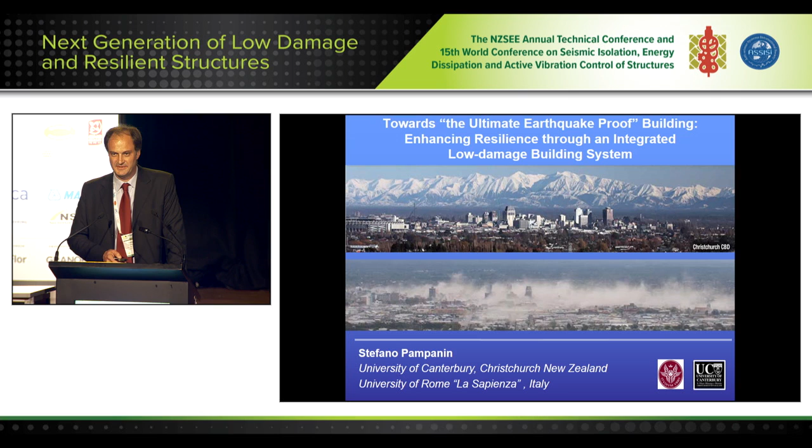Now, to try to enter right away into the core of the presentation, for the non-locals or people who have not been in Christchurch before the earthquake, that was Christchurch City before the earthquake. This is Christchurch City during the earthquake, and this is Christchurch detailing after the earthquake.

The one that we are going to, we all technical engineers said, what a fantastic plastic hinge. It looks like a Park and Paulay Priestley book. Before taking off the ceilings, after taking off the ceilings, this is the PricewaterhouseCoopers building, 22-story building, from 1980.

I've been literally using this slide for probably 15 years to show how fantastic the precast concrete solutions in New Zealand are when compared to somewhere else in the world, including Italy, where precast concrete is only precast. It's not a mixture between precast and emulation of cast-in-place, while in New Zealand, Japan, and other countries, you get actually a mixture of that.

So the emulation of cast-in-place means that you get an emulation of cast-in-place behavior in the connection, which means that you get a plastic hinge. That's exactly what you wanted to have because it's part of the capacity design consideration. And then as a result of that, you just end up having a building which has to be demolished.

Now, in a way, we knew that. From a technical point of view, as we know, the engineers in New Zealand have been a bit hammered by or blamed by the population, saying you did not do your job, you are incapable. It was quite a harsh time with a commission of inquiry, trying to ask why things did not work well. And we know that the answer from a technical point of view is that it actually did do the job of saving lives. So we are repeating things that we know very well.

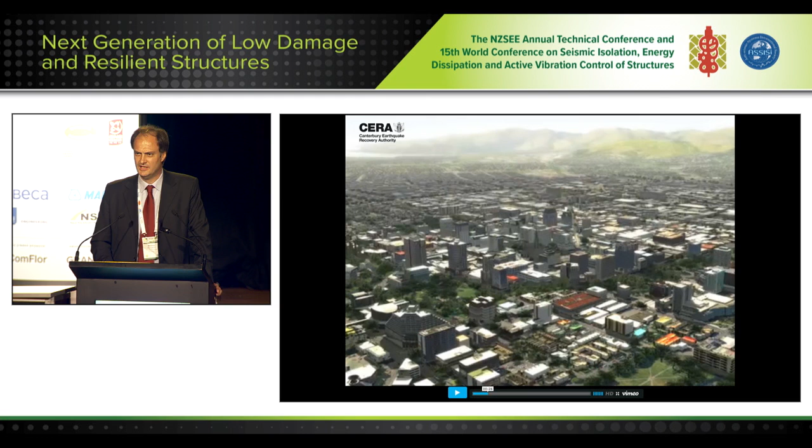Now, showing the CERA video of the city before and after, when I do it overseas, people are shocked. They are saying, but New Zealand is supposed to be a well-developed, non-corrupted, well-aware seismic country, where things, even in a big earthquake, should not be like that. And even worse, when I was explaining that from the aerial point of view, the city of Christchurch after the earthquake looked like something like Middle East, Dubai, under deconstruction instead of being in construction.

So quite a substantial result, which is questioning now, is becoming probably the most of interest earthquake in the world, because people are taking New Zealand as a model. They were, and they're still, in the sense that it's a well-developed, well-aware country in terms of seismic resilience, seismic resistance.

How could it possibly lose potentially 40 billion New Zealand dollars, which means 25% of the GDP? The Minister Joyce explained that it meant actually 20% of depth of the GDP increased in terms of debt.

Now, we were thinking about doing something okay. People are asking us, the population, society, to be safer and resilient. Resilient is something which is hiding everything, as Gianmario was mentioning - the mayonnaise for a cook can be an important term, but very, very complicated. So what does it mean, resilience?

If we borrow the concept, and that's been happening from other disciplines, resilience is the capacity to be hammered, in a way, to be impacted by an event, and then coming back, resurging back, but not in the elastic range. From our technical point of view, elastic would be to come back through the same path. It's not the same thing.

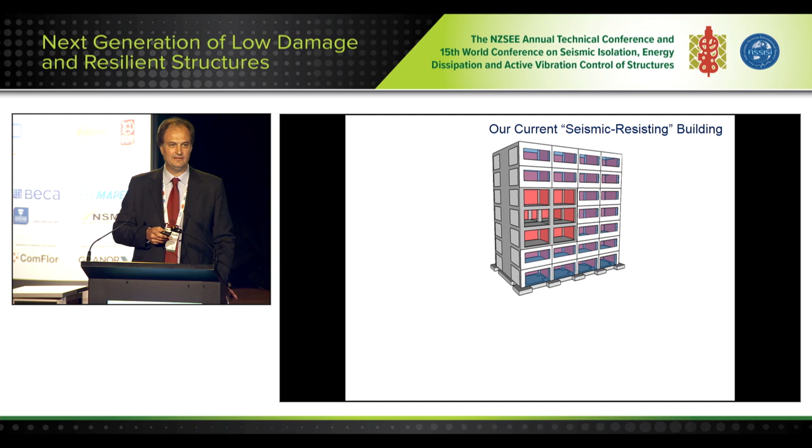So this is what we are trying to explain to the non-technical people about our contract. I'm the engineer, I'm designing for you something like that. I wish we were using all the same slides - I'm designing a seismic resistant building, which is going to have a fantastic plastic hinge in the beam column joint, and the skeleton of your building is going to be damaged, but where you want it.

So it's like having your knee being severely damaged, but you're still standing. Your hips or your diaphragm are completely gone because rigid diaphragm assumptions from an ETABS or SAP2000 code don't stand, so they're not really working in the rigid range.

Of course, the non-structural elements, heavy or not heavy, are going to be completely destroyed at a seismic design level, so a 500 year design. And if you're looking at the facade, the envelope of the building, unfortunately there's something which is actually a problem around the world, because these are supposed to be non-structural, but they can get into trouble, reaching a drift level, and they can fall apart and become life-threatening.

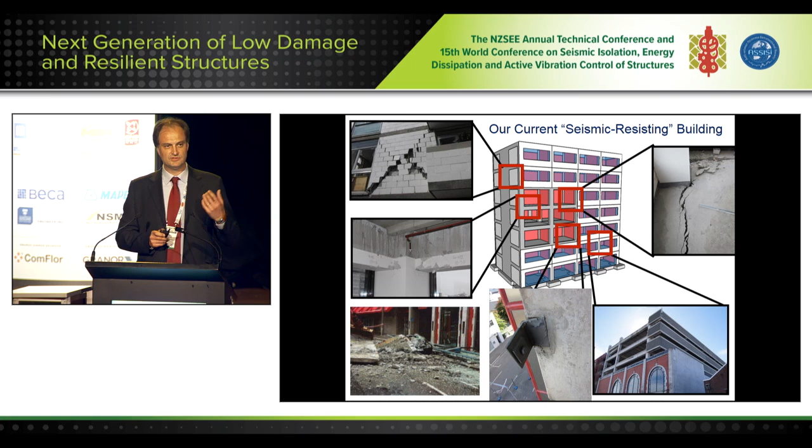If they are life-threatening, theoretically they should be able to stay there intact without collapsing under the design level of earthquake. No code in the world is actually implementing that, but every code in the world is talking about life safety. So we keep talking with our people.

This is just the superstructure, but then your foundations are in trouble. So this is what we hope Misko will give us some solutions for, because it's not only the superstructure, but also the foundation - the whole building system.

And we've been mentioning a lot about low damage, and what low damage means and doesn't mean. At least it should mean that the structure should be okay. Then it should mean that the non-structural elements, the dress of the building, which is very expensive, should be okay. And then it should mean that, of course, the foundation should be okay, and the whole community with the vertical infrastructure and horizontal infrastructure should be okay.

So in a way, we've been - I shouldn't say cheated - but we haven't told the truth to the population when we should be explaining that if you design by code everywhere in the world, that's what you get: a red tag. And if you want to know more about that red tag, this is an add-on to the Vision 2000 document: repairable, irreparable. We don't really know where the line in the sand stands, but we know that around here, more likely you're not going to be repaired.

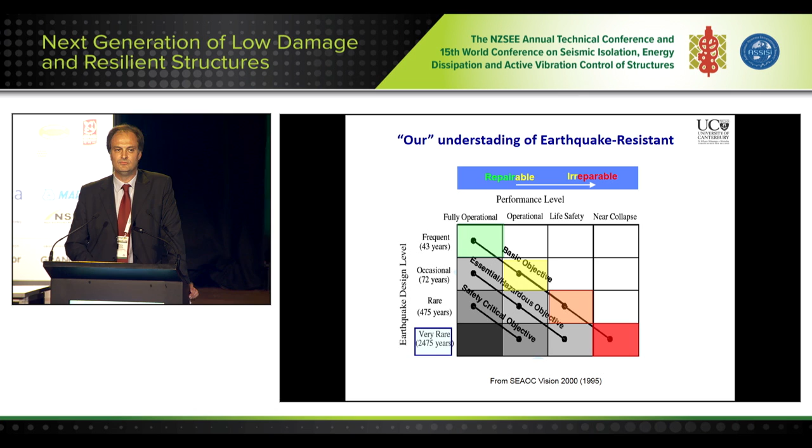So you don't get a new car unless you have insurance, but you are not able to restore your life very promptly. Same tagging system applies to something that we as engineers understand. Structural engineers, think about a pushover.

How many of us would still have a friend in our client when you go there and say, that's exactly what I designed for you, and I'm a fantastic engineer because I'm giving you a great solution - it's going to be a seismic design system. So what is the problem? We have not been explaining to the normal non-technical people that a code doesn't mean target.

A code is a minimum by law, something I often mention to my students. A code is what you have to follow if you want to avoid jail, nothing more than that. It's not meaning a good design.

So we are talking about earthquake resistant, and people are thinking earthquake proof. It's not earthquake proof. It's not bulletproof, come and shoot me. And this is what people think an earthquake resistant design is.

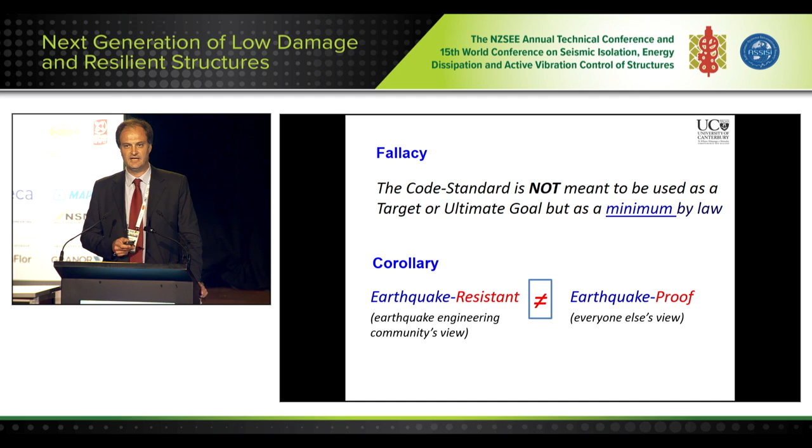So there is a major communication of risk that we are not delivering, and we should be doing more. In a way, what we should be doing is take this basic objective and push it back, making something whereby under a quite significant earthquake, I'm still in the good operational range.

Now, let's go back. Learning from our ancestors. We did not invent earthquakes, they've been there for a while. And we did not invent earthquake-resistant structure, they've been there for a while. One of the oldest possible ways of taking earthquakes and going through that is rocking marble blocks on top of marble blocks. No steel, no dissipation devices, no post-tensioning, nothing. It was really the concept of blocks moving against each other and getting the mass behaving as a weight and giving you stability.

The mass is bad, weight is good. Can we have something which gives you only a weight, but not a mass? We should basically be taking off gravity in one direction and not in the other.

Gianmario mentioned that we like to go back and see that not only the Greek system was providing a rocking behavior, but also they had something which was, this is a very bad broken English translation of the Latin of Pliny the Elder, Diana Temple was using charcoal spheres as well as wool furs, sort of a slider, in addition to the rocking system. Fantastic. They were extremely ahead.

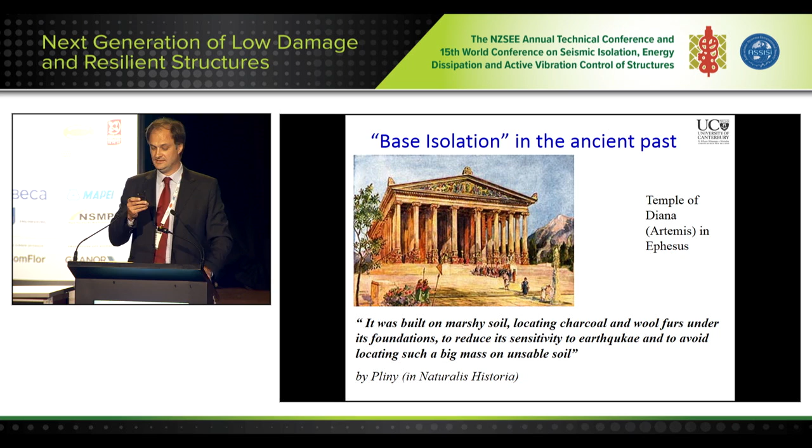There are other concepts and so forth. Base isolation was not invented by B.R. Robinson, but B.R. Robinson has provided one of the most used systems that has really been leading the world in terms of isolation, the lead rubber bearing. If you think about the other one, sort of a slider type of solution, that was already the charcoal and the wool furs, but the Greek did not have a patent.

I thought that this was one of the earliest. Gianmario proved me wrong, saying that the French, where is Caroline? Caroline. We can't give credit to the French for having invented the first patent. So I think that Viscardini, Italy, deserves to be referred as the one for that. Caroline, sorry for that, and Tony Holden.

So what are we doing? Basically nowadays it's re-engineering the past, re-engineering solutions of isolation, rocking, in a way that people have already been using, and trying to add something more.

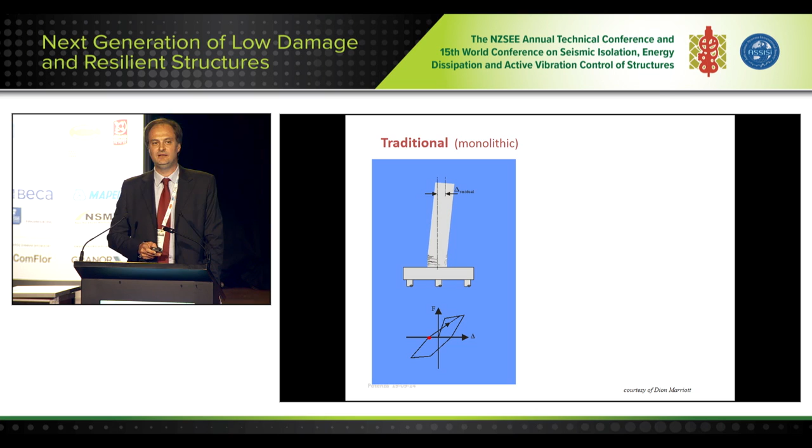So the new system is basically a new temple, which instead of going back and forth and getting the damage in the ductile plastic hinge, is actually jointed, is ductile, is a temple rocking, not made of marble, but made of concrete, steel, or timber, whatever material we want to use, glass, anything possible, and is taking advantage of a recentering massless weight. What is a massless weight? A cable, a tie-down. A tie-down is something that can give you stability, weight, but not the mass of the temple. So it's basically, and don't call it post-tensioning, call it a tie-down. Everyone will understand a rope.

While it's moving back and forth, now we have the option, which they did not have in the past, to use dissipation. What type? Easy, mild steel bar.

But if we want to move one step further, we have to think that very often people have been trying to imply that capacity design has been proved wrong by the earthquake. In reality, I'm saying that capacity design has been saving a lot of the concept, has been saving thousands of people, possibly in Christchurch, possibly, not just around the world.

But capacity design is still extremely valid because, if you remember, it was nothing else than the concept of the chain. And we are still applying capacity design, and we must apply capacity design in any single possible new connection or new system in the future, where for us capacity design is the whole building system.

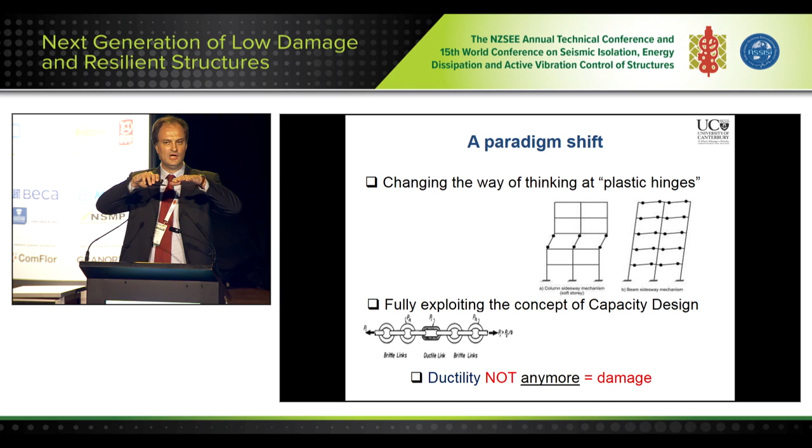Starting from the foundation, moving up: skeleton, non-structural elements, horizontal, vertical—the whole concept should still be maintained. In the past, pre-1970s, we were at a certain level, and then we got to the weak beam strong column mechanism, capacity design, where a plastic hinge meant damage. That wasn't a capacity design issue, it was a technology issue.

Lack of technology, not available until a few years ago, implied that a plastic hinge means damage. Now, with technology that's 2,500 years old—like the Greek temples—we have the opportunity for a plastic hinge not to mean damage anymore. But if we have steel rebars within our connection, we still get a system that's not easily repairable. So how do we get repairability at the weakest link of the chain?

Let's think about concrete in a different way. Instead of having the steel inside the concrete, let's put the steel outside at the connection level. This steel outside, if properly protected from corrosion and arranged to have an anti-buckling behavior, is basically the fuse—the electrical fuse—of our seismic system. It's our seismic fuse. It's a capacity design implementation.

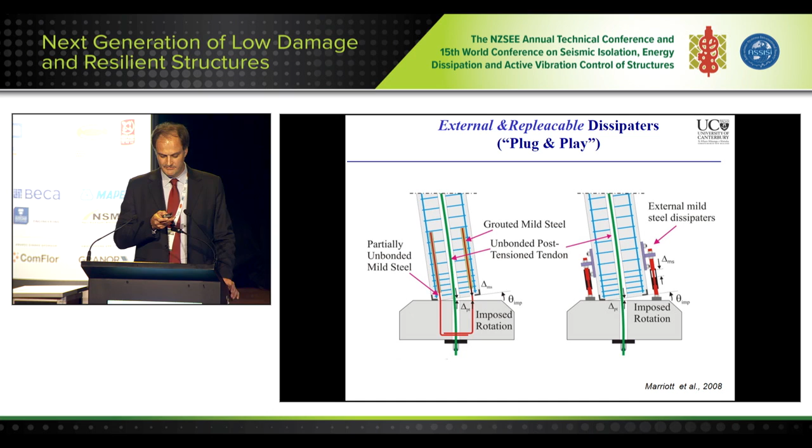We like to call this plug and play. Why? Because if you give something a name, people remember it, they like it, it becomes fashion, and they use it. This has been one of the successes of this concept.

Think about communication of risk—instead of talking to our clients and friends about a damaged plastic hinge, we should be talking more about what type of viscous damper, shape memory alloy, or device 2.0 you have in your living room. That was a joke back in 2005, but if we make earthquake engineering fashionable, we now have the possibility of getting things to happen much quicker and faster.

You can do it in concrete, steel, or timber—the whole concept can be developed once you grasp it. Obviously details have to occur in different ways, so R&D, research and development, has been happening quite quickly in the last 12 to 15 years. And this is only about components—then there's frames and walls.

Then you have to address the flooring system. There's been a huge effort, starting definitely in New Zealand, with a lot of contribution—Des Bull and others—pushing for diaphragm solutions. There are different options we can now implement, like non-tearing flooring solutions, and so forth.

What I'm saying is put everything together. And don't forget the dress—being Italian, you'd appreciate that we care about that. What I like about Italian architecture, from my half-life over there, is that the architects are quite demanding: fair enough, whatever you give, but I still want to maintain the energy efficiency of the building and the whole architectural beauty, and so forth.

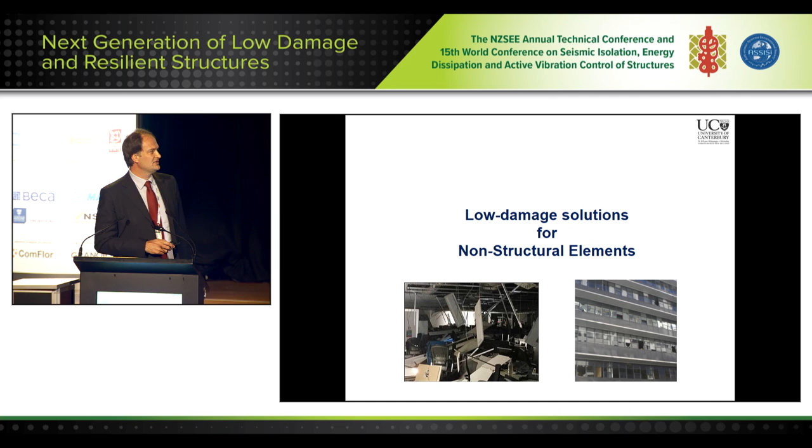So what we're getting at is thinking about a skin that goes around our skeleton—a waterproof skin which is deformable but not damageable. What we're doing is dividing the skin into many small pieces, similar to what you see in some animal furs—many small pieces moving slightly against each other. That movement, whether for partitions or facades, allows the overall movement to happen.

We've been developing this system—they exist, they can be adopted, and they've already been used in some situations. As low damage—we're not saying non-damage—they can achieve, for clay bricks, partitions, or facades, up to 2.5% drift without a single crack, which is quite substantial. The whole concept allows this small rocking movement of the Greek temples within the system.

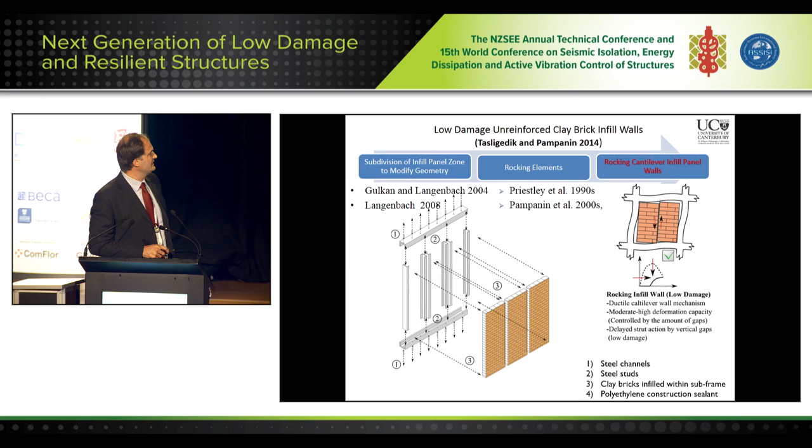Now let's see what it looks like. To our clients we should say: forget about the old generation of buildings. Now we have a new generation of buildings, made of a skeleton which is likely repairable, a flooring system which is repairable, and a dress which is more likely repairable, or at least less damageable, and so forth.

If you put the whole package together, you're getting towards earthquake-proof. We don't have the earthquake-proof building just yet. Gianmario spoiled the surprise—well, not really the surprise.

He showed that an isolation system using lifting a house will be the future. I mean, it's a concept. In reality, we're going to get the ultimate proof building when we're able to completely lift up our house or property when the earthquake comes, maybe using magnetic fields and so forth.

So, 15 years of research in a lab, where the skeleton and the dressing are all put together. I'm going to show you not the details, but the whole thing put together. Now, hold on—if it works, it's supposed to be working. Hold on, go back.

Now this is supposed to start. Why isn't it starting? It's just delayed.

This is basically a renewed rocking Greek temples, beam and column, post-tensioning through. You get the dissipators, the plug and play top and bottom, and these went through literally 100 earthquakes before we allowed the press to come over and see what it looked like, because we did not want people saying we were bringing bad luck when doing research.

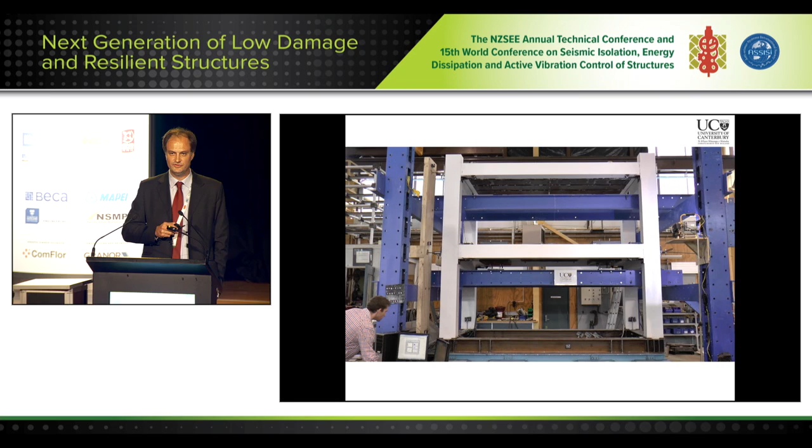This is just an example, excuse me, it's supposed to be going. This is the example of the rocking temples in action, the modern version. There you are, 2 minutes, okay.

So it's moving a lot. Just imagine this big opening here typically would be diffused, spread in a plastic hinge, meaning a lot of cracks. The sum of those cracks are now concentrated in gap opening, and the plug and play, which can be made of anything, are actually working.

And this, if you can make it work, and then I'll be flying through, is the skeleton, the skin made in pieces. Focus over here if you can.

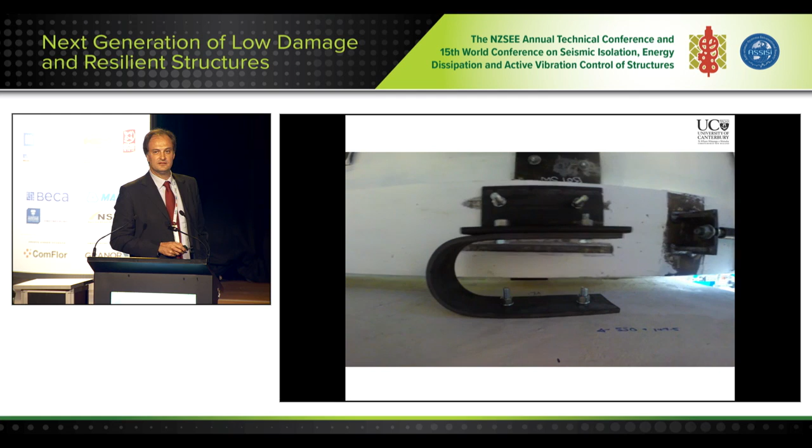There you are. You see a little bit of relative movement is allowing the system to take quite a big level of drift. And underneath, the connection can use a U-shaped flexure plate invented by Ivan Skinner in 1972, or anything else.

Now, quick and fast, because I have 1 minute 20, probably Misko will be reminding us that the whole system is not only made of the superstructure. The earthquake in Canterbury showed that there are issues of soil structure interaction. The foundation suffered a lot.

From a point of view of performance, from the point of view of a geotechnical engineer, that's the pushover they'll be thinking more about. So it is possible, we've been working on it, to make an integrated performance-based design where the superstructure, the foundation, and the envelope in terms of non-structural elements can be accounted for.

Vision 2050, New Zealand reconstruction, the blueprint, there's been a lot happening, and there's a lot of this technology going on. You can go on site, and you might be going into some of these buildings, concrete, steel, concrete timber, and all the rest.

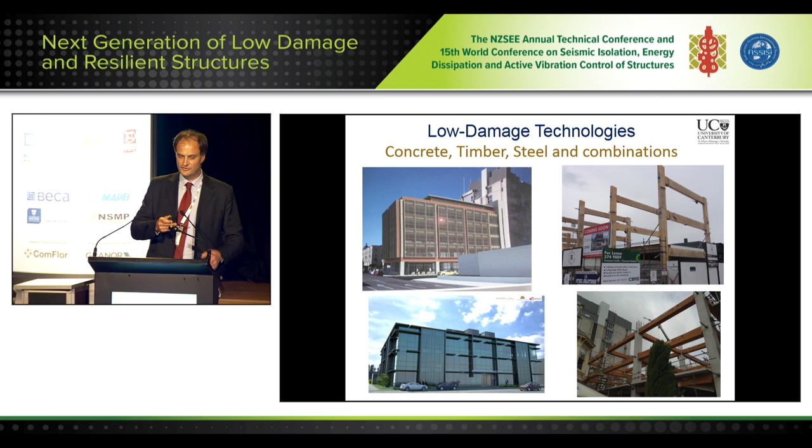Now, I want to finish with 3 challenging slides. In the future, we want to get into a system which we can actually monitor, but not from the old way of thinking. You would like to enter a car and know everything, and these are written in Italian on purpose because you will know what they mean. We should be having our building system telling us what is happening to the building system as it goes.

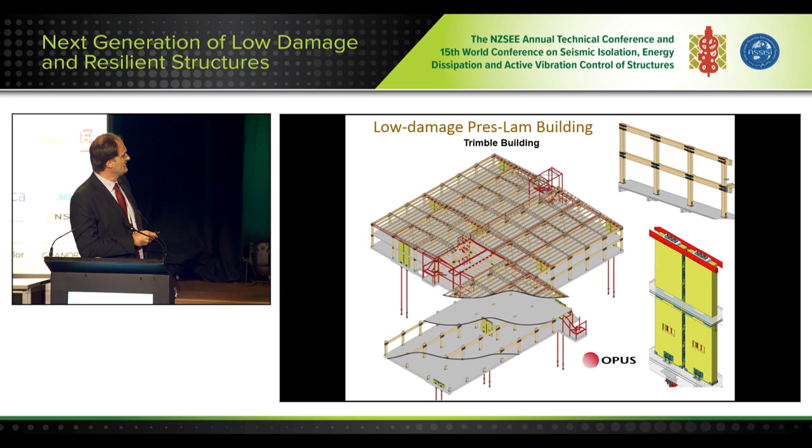And this has happened partly in one of these low damage systems, and the concept is to have safer, sustainable, smart, S3 design, where you're going to have a system which is supposed to be safer, sustainable, and smart, fully monitored, and can give you this solution.

Last slide. Now, how much does it cost? Think about what has happened in the last few years. So the telephone moved to something, a mobile phone, which was very expensive, and then eventually we got what we got. How much did it cost? At that time, divided by the salary, it was quite expensive. Later, when it came out, divided by the salary it was less expensive. Now it's affordable by everyone.

So similarly, now you understand the thing, you can think about the computer. You remember this, IBM 1980?

Hugely expensive, less expensive, everyone has one. Now, why do we not think that a building system, post-1950 capacity design, and rocking cannot be affordable?

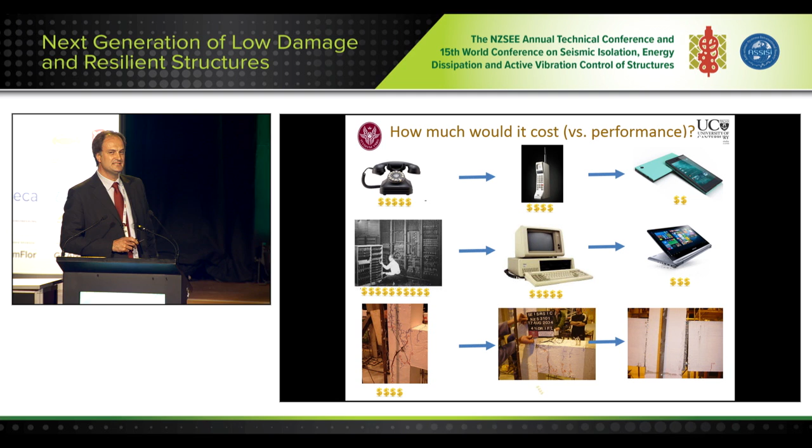It's a matter of people doing marketing on other things, so no one is actually doing marketing on this. We should be telling people that the cost in this case did not change dramatically, but the performance changed dramatically.

It's really a matter of communicating what we are doing, and the challenge we face is: if we really want a full building system, the whole nine yards, who is going to help us sell it? It's not our job to sell it, like people would for computers or phones. So maybe we should bring in, just to name some, iPhone, Samsung, or Huawei, to buy the New Zealand IP of the low damage technology and sell it around the world on our behalf.

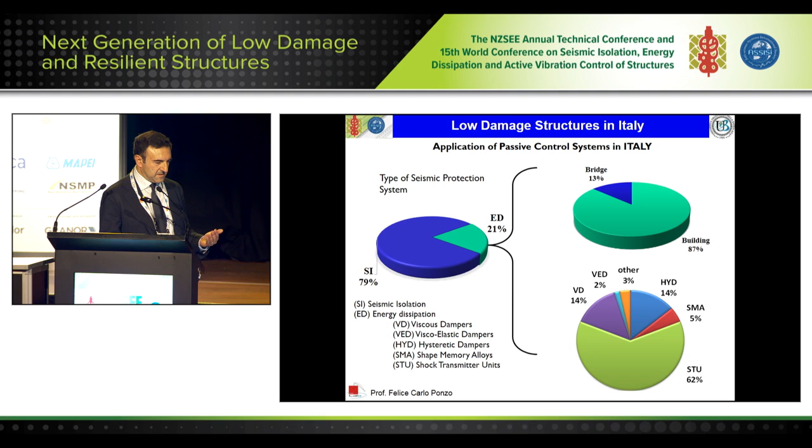We are now considering what the future holds for this kind of application, starting from research. Our activities are developed within a large Italian program, the RELUIS project — a network of university laboratories of earthquake engineering that now involves more than 1,500 researchers across almost all Italian universities working in the field of seismic engineering.

That network has facilities for earthquake applications. In our laboratories we have a testing machine for type tests and factory production control tests, able to perform tests on several kinds of applications. You can see here some examples of tests we perform, which allow us to better understand the behavior of these devices.

But as Gianmario Benzoni said this morning, I think it's now the moment to start very strong collaboration between earthquake laboratories, in order to better understand the behavior and how we can use this information to improve the behavior of the devices and of the structures.

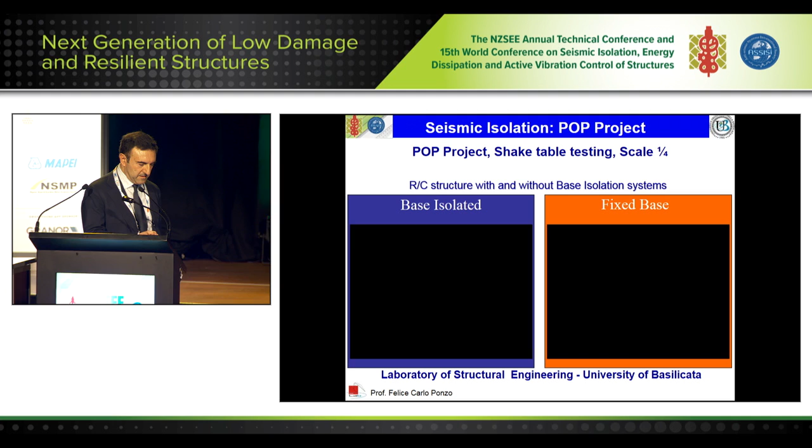Our activities are mainly devoted to the study of existing buildings, because there is a big problem in Italy. We started with applications considering existing buildings designed only for vertical load.

Then we applied several kinds of base isolation systems in order to understand the performance of this kind of device. We used rubber, steel, friction bearings, and shape memory alloy-based bearings in order to evaluate the ratio between performance and cost.

We observed that almost all devices had the capacity to improve dramatically the behavior, reducing the interstory drift under the damage threshold for non-structural elements too.

In this application, you can see other tests we performed on buildings designed for vertical load only, considering also the application of infill panels in order to evaluate the damage on this kind of element.

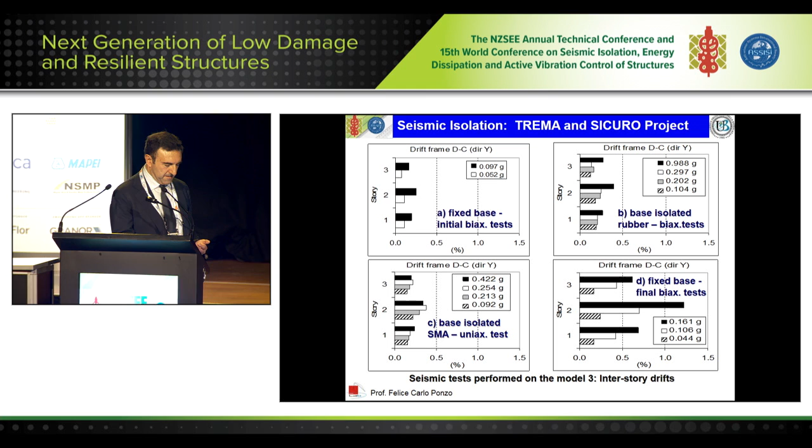Also in this case, we observed a very good behavior of the specimen, achieving good performance with a very low drift value observed at the end of the test.

In several tests, we also used in situ application, because after lab tests, several kinds of devices were applied in real buildings. So we performed some release tests.

In this case, it's a building in Basilicata, in Italy, south of Italy. We moved the building using a special device, then we released it suddenly in order to verify the effectiveness of the device.

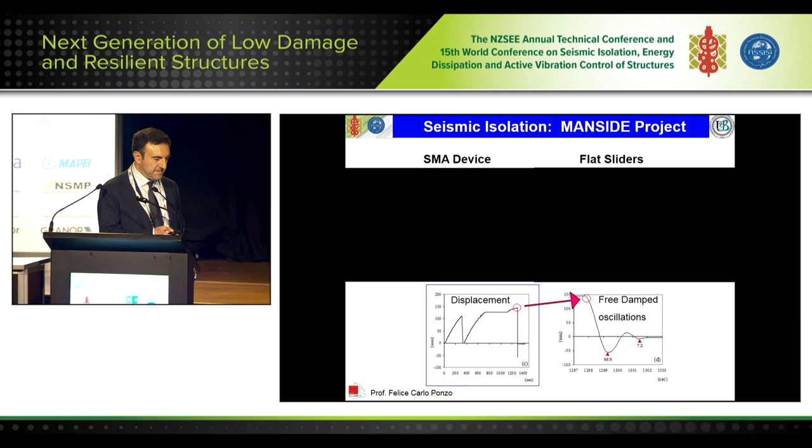We used three configurations: shape memory alloys, rubber, and mixed rubber and sliders, in order to understand the difference. All the devices were able to reduce drastically the oscillation of the buildings.

Using the CAM system, it's a cable narrowing that produces some increase in the out-of-plane resistance of the masonry, and also base isolation using the rubber bearings.

High damping rubber bearings, and we observed also that buildings designed for vertical load were able to overcome the very high ground acceleration.

In this case, we used some lab tests in order to evaluate the behavior of double curvature friction pendulums. It's a device with a very increasing number of applications in Italy now.

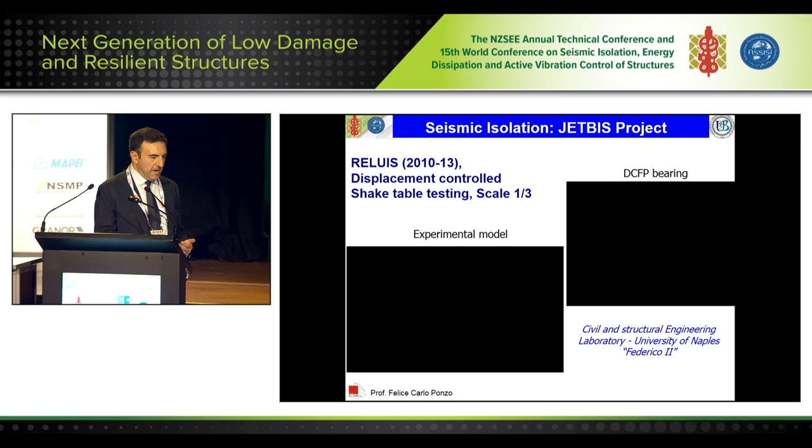For that, we need to understand well the conditions of functioning of this kind of device, considering different kinds of friction - high, low and medium - to understand the residual displacement. We used several tests with real accelerograms and artificial ones in order to understand the capacity.

Moreover, using this kind of device we performed new in situ tests. This is an industrial building based in Sicily, in Augusta. We performed on the completed building the release test using a public test.

In order to verify the effectiveness of design, to verify the capacity of the isolated systems, to verify the real damping, the modal shape and the frequencies, then the period, the correspondence between the real and design period. In that case, we found very good agreement between design and experimental values.

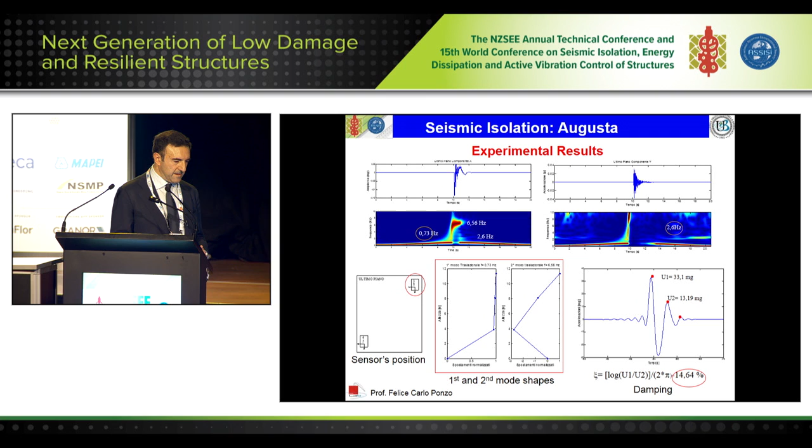Changing the kind of devices regarding energy dissipation, we performed a lot of tests in order to understand the difference between several materials. We considered hysteretic dampers, but also viscous and shape memory alloy based, in order to understand on existing buildings which is the real behavior.

In that case, we used lab tests, but also in situ tests realized in the ex-Italsider Bagnoli industrial area near Naples, where we used a real building, cut it, and for each piece we used several different kinds of devices in order to understand the behavior. In all cases, we found good capacity of the buildings in reducing the seismic vibration.

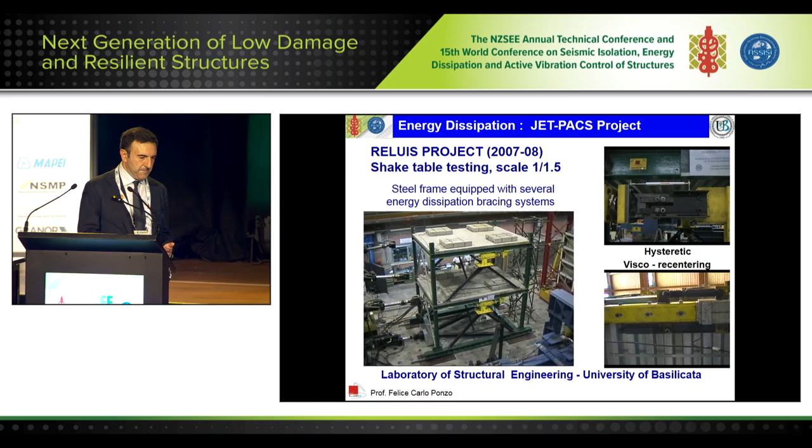We are observing another test performed in the University of Basilicata lab, in which we performed the test considering seven kinds of devices. A lot of universities in Italy were involved within the RELUIS project, and we used hysteretic devices with steel, aluminium, visco-recentering based on shape memory alloys, viscous dampers, and so on.

One of the results, very interesting, of this kind of application was that the dissipating braces systems are very robust. It's an approach that allows reaching good results, also changing the mechanical characteristics of the devices in a very wide range.

We found that, for example, for hysteretic devices, changing by plus or minus 50% the resistance, the results don't change - it is very robust. At the moment in Italy, there is an increasing number of real applications in the Basilicata region. We now have almost 10 buildings, mainly school buildings, realized with this kind of application.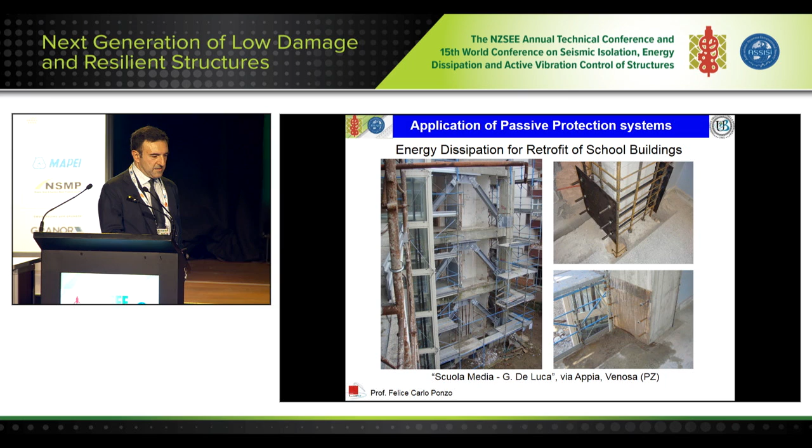Steel braces with, in this case, steel devices. You can see here some details of this kind of application. This is a school in Potenza city, and another school that certify the capacity now of companies, but also of designers to consider this application and to design this kind of solution.

Another kind of application that we studied is the DISCAM system. It's very near to the concept of the PRESSS system. We used some dissipative elements in the angle, as shown before by Stefano. In this case, the dissipative elements are formed by L-shaped mild steel, and they dissipate energy in the rocking movement between beam and column.

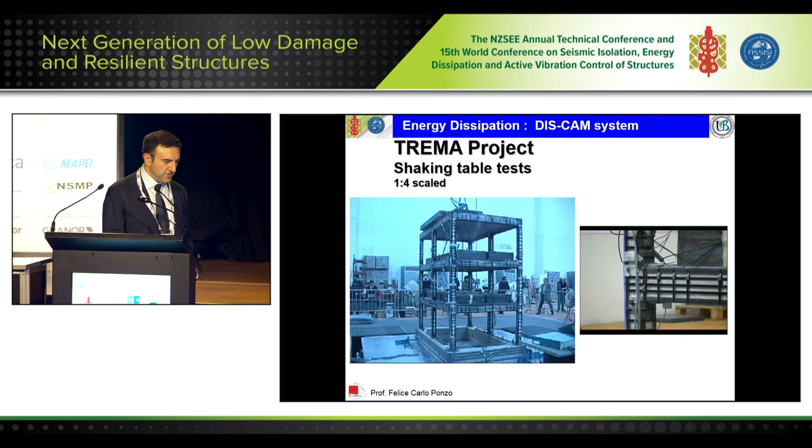For existing buildings this is a very, very effective mechanism. In this case, we used a frame realized considering only vertical load. We applied very strong motion in order to verify the capacity of this kind of system to protect buildings.

At the end, I link with the presentation of Stefano. I will present experimentation we are carrying out at the University of Basilicata in collaboration with the University of Canterbury. We started using the system to verify the capacity of beam column joints to be applied also to glulam, a different kind of solution for wooden structures, the typically Italian and European solution.

And we applied the test using also the configuration in the... I don't know if we can go back, but okay. In the movie, you can see the movement of the steel elements during the rocking of the beam with respect to the column.

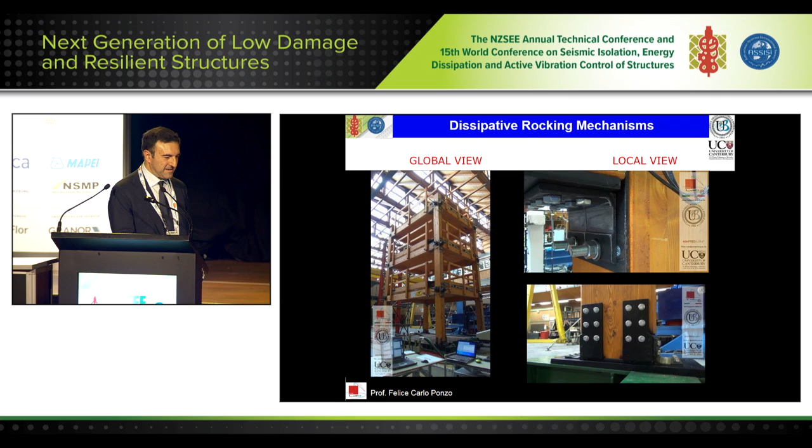After that, we performed the dynamic test on the building, on the 3D buildings. In that case we applied at the moment almost 150 destructive earthquakes without any damage. So we demonstrate that the system is very, very strong, very effective.

The next step, this is some result in order to verify that the system is very good with the post-tension. There is some improvement of the behavior using the dissipation, in terms of increasing the capacity of displacement and the peak ground acceleration as input for the building.

The next step will be a new solution in order to reduce the displacement for this kind of building, using, in that case, bracing systems with U-shaped steel elements mounted on top of the inverted braces. Now we are starting with this kind of application.

Next June, I hope to have Stefano at the University of Basilicata to present the experimental results to the engineers in Basilicata. We can see here some pictures of the work that is now in progress.

Concluding, the experiments that we are carrying out in Basilicata are confirming the effectiveness and robustness of this kind of strategy. I think now we need to change the design code. We need to change the way we design, because it's not possible now to accept any damage. It's important to reduce the damage after an important earthquake.

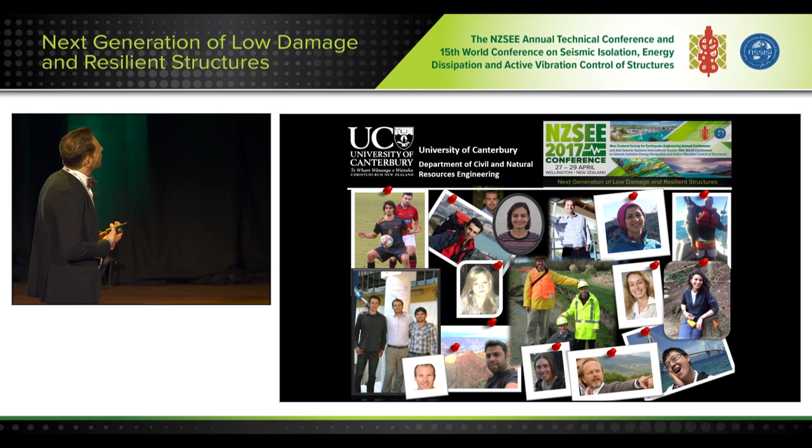I see myself more as a messenger of a wider group. These are all young researchers, but also colleagues that I work with, starting with Stefano in 2003 when I came over as a postdoc.

So let's talk about item number 8: lessons learned from recent New Zealand earthquakes. I want to go straight to the Kaikoura earthquake, since we had a good presentation yesterday with a good overview. But I want to point your attention to two case studies.

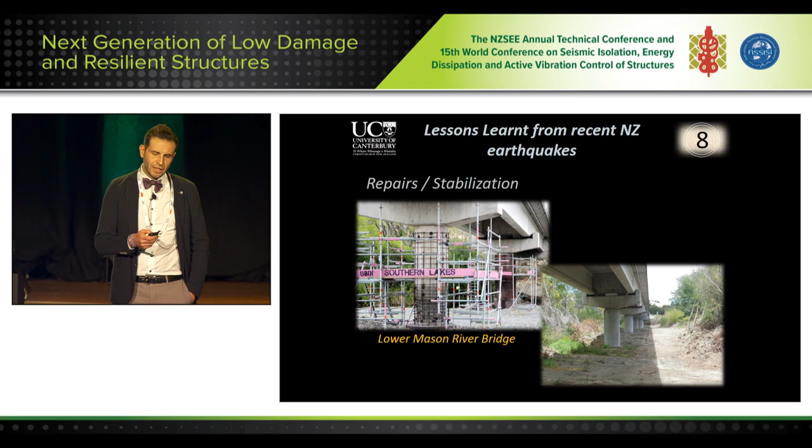The first is the Lower Mason Bridge, which is very close to Waiau, near the epicenter of the earthquake. This bridge sustained damage where 7 bars fractured out of 16. The bridge was obviously very close to collapse, and it was repaired within 1 month, though with loss of functionality in the meantime. The repair was a sort of concrete jacketing.

Now we look at the Awatere River Bridge, close to Blenheim. This bridge is interesting because it went through 2 major earthquakes: the Seddon earthquake in 2013, where they did jet grouting on the piers, as you can see at the top and bottom, and then in 2016 the Kaikoura earthquake caused further damage.

This poses some questions about post-earthquake residual capacity. What are we going to do - grout injection again with this type of structure? Or do we need to think about how to sustain structures through multiple events and long duration earthquakes?

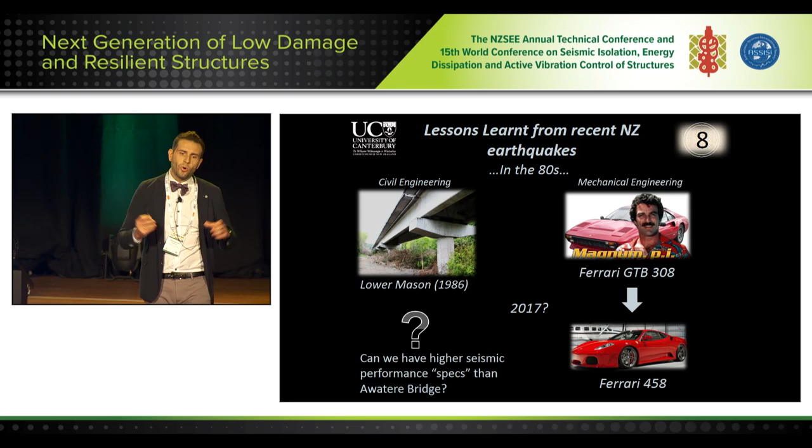I like to think about the Lower Mason Bridge, built in 1986. In that period I was a kid, watching Magnum PI and the Ferrari GTB - being Italian, I like Ferraris. Now I think about 2017, and I say okay, this is the new Ferrari, the 458 - totally different from the 308. The Awatere River Bridge was designed in 2007, and this is the supposed Ferrari we are currently using.

So what we have to think about is the ingredients for a perfect damage control recipe. This is item number 7.

We know there are a set of damage-resistant technologies, and obviously we know about seismic isolation - there have been excellent presentations so far. We know we can also use pure rocking, either rocking of the foundation or stepping piers, with a beautiful example here in New Zealand, the Rangitikei River Bridge designed by Beca.

Or alternatively, as you've already seen from Stefano, we can think about mechanized hinges, which have self-centering capability and the ability to replace the reinforcing after the earthquake. For a bridge, this is quite a good concept, because designing those connections follows exactly the same philosophy as designing a plastic hinge type bridge. You've already seen this with Stefano, so I'll go quickly.

This is a comparison between a monolithic system and a new generation system. With this new generation of systems, you tend to have one big crack happening, minimizing the damage in the member. Or alternatively, you want to know how to repair it after the earthquake - this is really the key thing still missing in our design codes. These are details I want to show you later with some testing we've done.

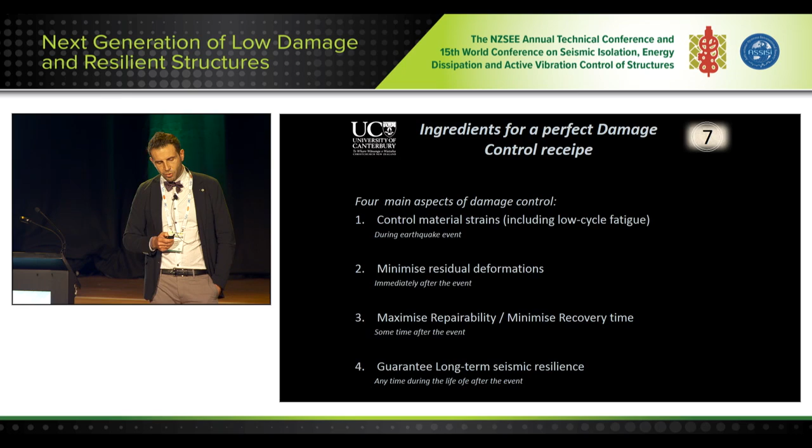Now, item number 6 is really application of the technology into bridge substructures. Can we design those sort of plastic hinges with this new high-tech damage control rocking system? And the answer is yes.

What we have done in the last 6 years, thanks to the project funded by New Zealand Natural Hazard Platform, we went through a set of different types of bridge piers, hammerhead and double pier bent, and we targeted low to medium span bridges because that is what we have here in New Zealand. Mainly we are talking about precast concrete decks, and these are sections that come from the NZSEE research report.

I want to show you 3 different types of approaches. One test we did was to minimize the initial cost of this sort of structure. Let's have as fuses internal bars which are debonded for a certain length, but have already in mind what the repairability is going to be. So we put pre-inserted threaded sockets, and we did the test. Then we cut the bars through, and post-installed axial devices that I will show you the details later. We've done it in such a way that the moment capacity is pretty much the same, and we have the same ductility. This way, we don't have to strengthen or redesign the foundation, which is very important.

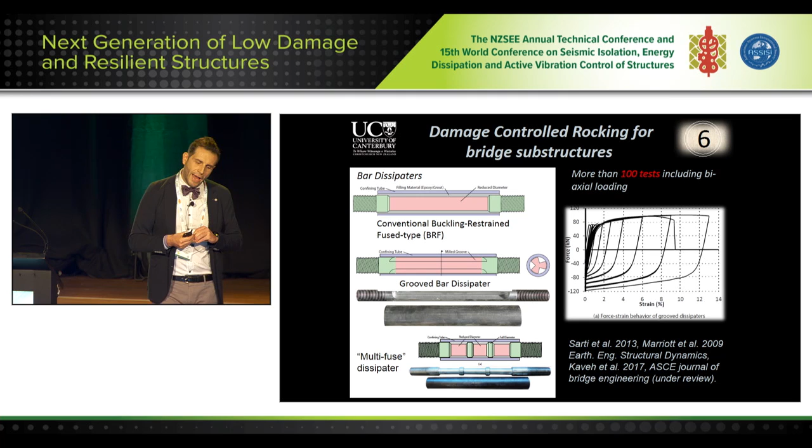As Stefano mentioned, when we talk about axial devices, we are pretty much talking about bars which have been necked down. The first one at the top is a sort of mini BRB - I know this is probably the most Googled word in New Zealand at this stage. But we also developed dry dissipators, where we don't put fillers between the tube and the bar - these are grooved bar dissipators, as you can see in the middle one. And then we have a multi-fuse dissipator at the bottom.

Very stable performance, and the actual devices work very well. We did more than 100 tests. We have papers published with design guidelines, and for sake of curiosity, we also tested bidirectional loading on bridge piers, and confirmed the device is working very well. I know some researchers found issues, but I think those issues were because the detailing of the connection device was not properly detailed, and that is very important to consider.

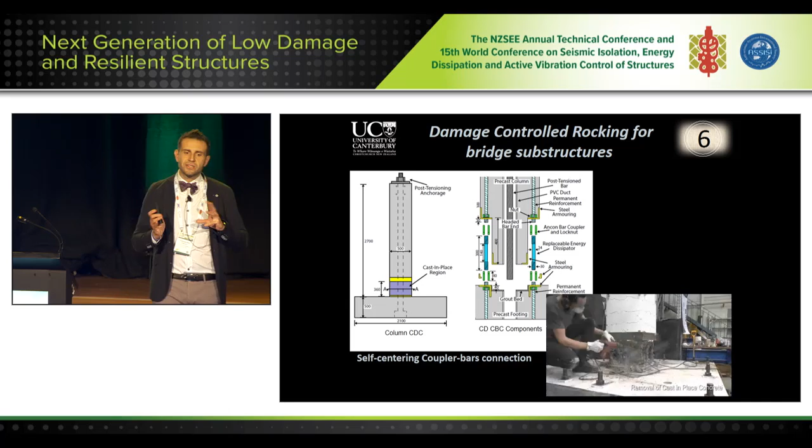This is another solution where we decided to use couplers. Couplers are not allowed to be used in the plastic hinge areas, but what we did, again applying capacity design principle, was fuse down this part so we have a grooved section. The idea is that after the earthquake you accept to have a little bit of damage in the structural member, but we know how to do it.

You see here, the couplers are all put with denso tape. After the first test, you remove the concrete, and then replace the couplers.

In this particular case, self-centering is crucial, because if you don't have a post-tensioning or anything like a rubber band which brings the structure back to its original position, what you're going to have is a misalignment of the couplers. You won't be able to repair the structure after the earthquake.

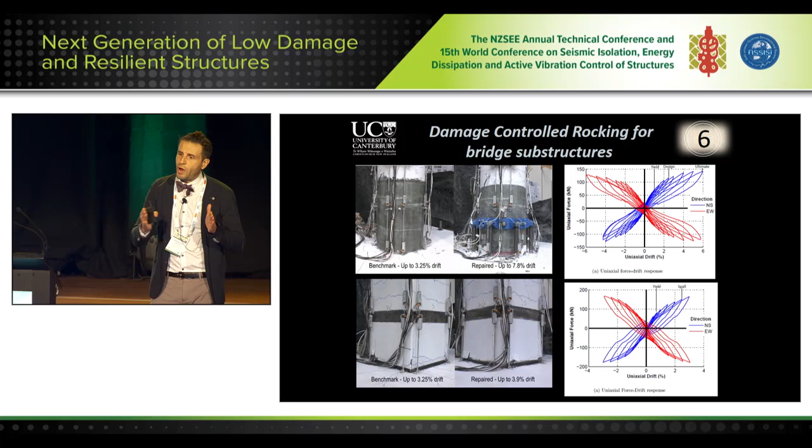What we also tested was the benchmark at the beginning, the solution, and then the repaired one. We don't have time to go through the hysteresis, but the concept is to show that it is possible to implement it. The key thing is to have a pre-planned repairing strategy when you design your structure. This is really critical if you want to have a low damage structure.

Then there's the most obvious one, you've already seen some applications. We tested the pier bent. We also tested a monolithic type connection system as a benchmark, though I don't have time to show you that here. With this sort of system, you can choose the device that you wish. We came out with an invented new device, and we actually combined devices together as well. What I want to point out is that in this connection we tend to always have shear keys in order to decouple the flexural capacity from the shear capacity. You can see here, as I said, a big crack developing at the bottom of the pier.

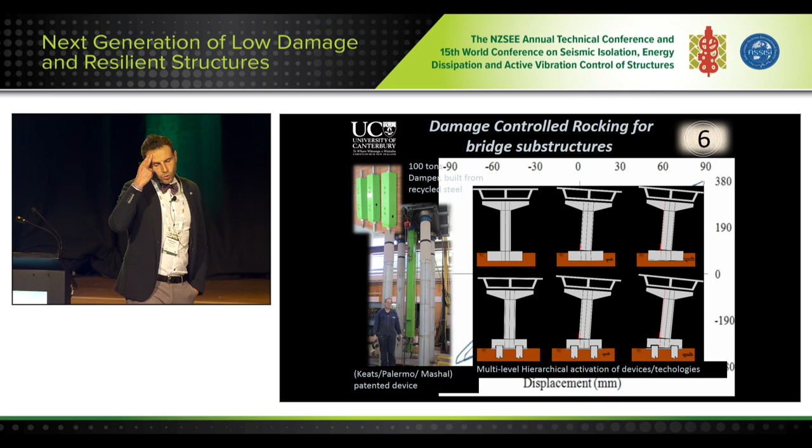As Stefano was pointing out, it's not either isolation or control rocking, we can even combine the technologies. The idea is we could combine them to create a multi-level performance-based design, with devices activating at different performance levels to increase the overall robustness of the structure. One student, Royce, is going to do a big test, where we'll have rocking between the pier and the footing developing at ULS, and then activate a pure rocking at the bottom of the footing. So it's a combination of rocking and control rocking. Not sure if it works, I'll tell you in a month.

Let's move to item number 5. Can we also apply the technology in a bridge superstructure? This is a little less obvious, because usually when designing the superstructure you think about seismic isolation, the connection between the deck and the pier. What we actually decided to do was create a control rocking system within the deck itself. The concept is very similar, we have post-tensioning and different dissipators. I want to point out that NZTA started a seismic strengthening program 15 years ago using linkage elements, with a different philosophy, to keep all the bridge parts together. This concept has been tested on a large scale.

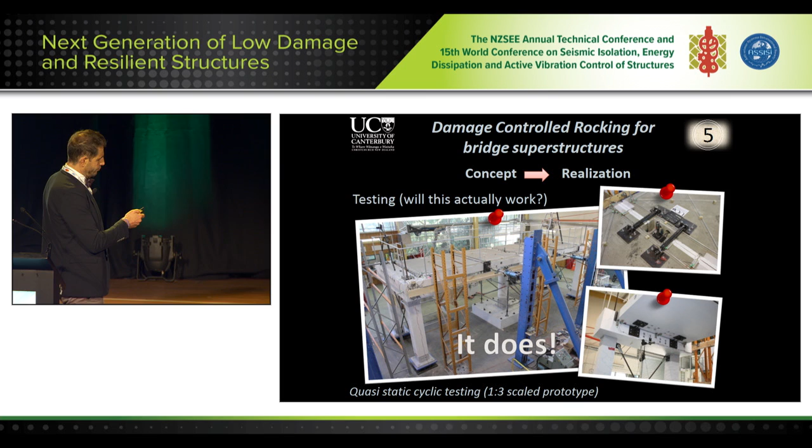This was the last test we had in our extension lab, and these are examples of the devices we placed in the deck. We tested two configurations because we were targeting short span bridges. Imagine a 20-25 meter span, and sometimes a 4-lane bridge, meaning a 20-25 meter width. If you start having rocking of these elements with that configuration, you get huge beam elongation developing within the deck, and if the abutment is locked in, you get a huge compression force developing in the deck. So we decided to split the deck and put U-flexural plates between the members. Again, this device was invented by Ivan Skinner.

Since we're running out of time, I want to quickly show the kinematics of one of the few tests we did. This is looking from above, you can see the deck rocking over the pier, while the pier remains elastic. And then the U-flexural plate is activated by the relative movement of the deck.

Item number 4 is the Wigram-Magdala Bridge link. Remember this bridge because I believe it's the first one using this technology in New Zealand, and probably in the world. I'm very happy because it's close by to the university here in Christchurch, so I can take students to have a look. Nothing special, if you look from outside it looks like a conventional design. The bridge was designed by Opus, and we were involved as peer reviewers of the bridge.

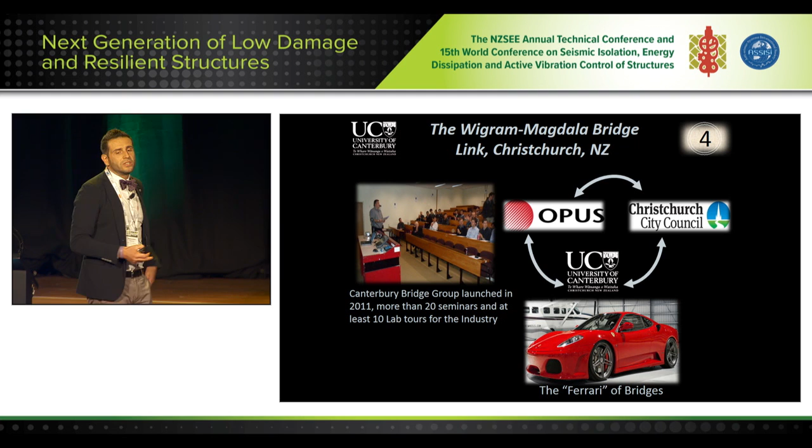What I want to mention is that the innovation was actually in the way we achieved this bridge, because we launched the Canterbury Bridge Group in 2011. We had more than 20 seminars and more than 10 lab tours, and in this way there was tutoring and collaboration between the Christchurch City Council, Opus, and the University of Canterbury. At the end, what they wanted was the Ferrari of bridges, the latest model. I think this was a great achievement, and the designer Peter Rutledge was really a great mind. I'll show you some details I couldn't even think about.

So the bridge is a typical conventional design, let me go back, a typical bridge with super T-beams, 35-meter span. There's a bit of complexity, it's skewed on one side and flat on this side. The footing was already designed by Beca, so there was some constraint with the footing design because the capacity was already predetermined. The idea was simply to create a control rocking mechanism developing top and bottom transversally, and then longitudinally the rocking develops only at the bottom.

One requirement from the client was to have the dissipators not exposed, which created huge challenges with the detailing. The dissipator is grooved and replaceable. We used a 50 millimeter Macalloy bar here, which was another challenge to source, but you can use a tendon as an alternative option, and this is sectionable from the top. I want to quickly show this, if it goes... no, they say to press strongly but it doesn't. Sorry, I got stuck.

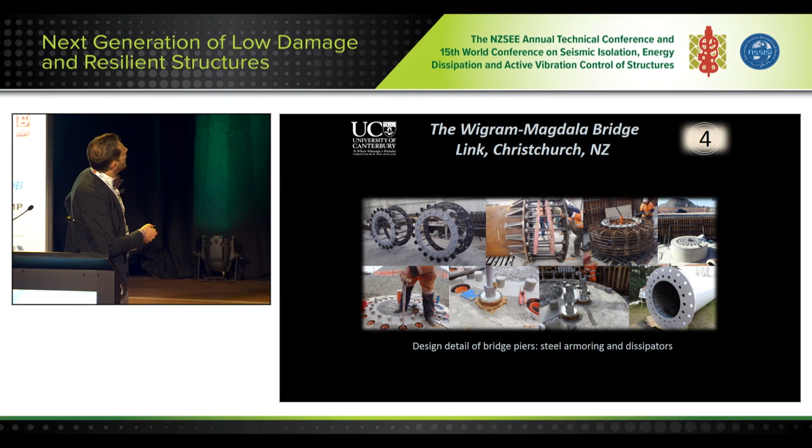So these are some details. We have internal shear keys. We use the bridge as a steel tube externally, and these are devices, the installation of devices. We put Denso tape in, and then I can't really...

This is the detail of the construction sequence. I just want to mention that the pier bent was cast in place, and then we used the super T-beams as a decking system.

At the end you will ask about cost. I will tell you the cost was around 200,000 more than a conventional design, over an 8 million project. Overall, Hawkins was the contractor, and they finished the project 6 weeks in advance.

So if we move forward—this is bad because it's slowing down my time—item number 3, design shift for reparability.

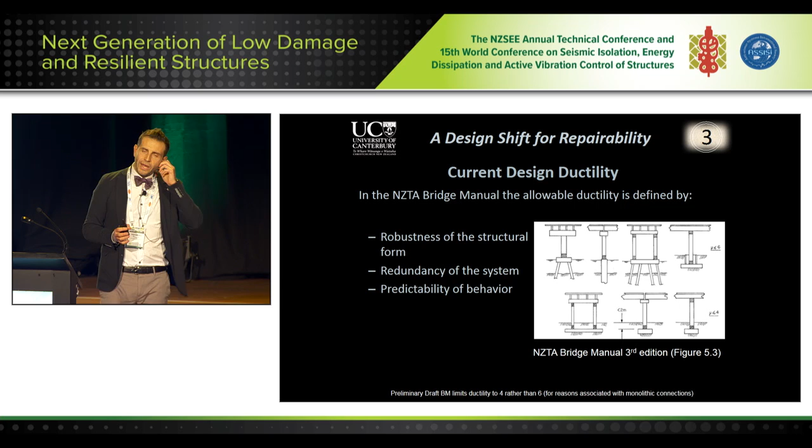In the bridge manual we have a sort of bonus: if you define your allowable ductility, you have robustness, redundancy, and predictability of behavior. The question is, what about repairability? I think this is a good question because we can ask, can we design those structures for higher ductility and still guarantee maximum credible earthquake event performance?

I don't have time now because I only have 15 seconds. There will be a follow-up session, and Brandon is going to talk about whether this is achievable. I also like fishing, as you can see here.

Item number 2, 45 seconds. What about resilience-based design? I start here with a question: are we REDi for bridges? Because REDi is an initiative, I think driven by Arup, where they're talking about a resilience earthquake design initiative. When you look at resilience, it's about reducing the failure probability, reducing consequences from failures, and reducing time to recover. All this brings to functionality.

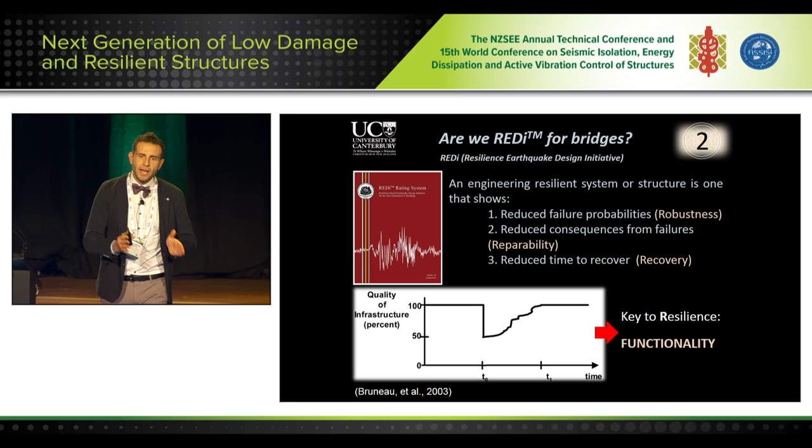What we are doing—we're actually working with another PhD, and she's going to present in a follow-up session—we're looking at developing recovery functions on specific case studies to better communicate with the client what is really controlled damage, because it's all about being able to repair the structure in a very short time. As Stefano mentioned, the future is to combine low damage technology with monitoring. If we could have that embedded with cost-effective sensing, we could reduce quite a lot the recovery time.

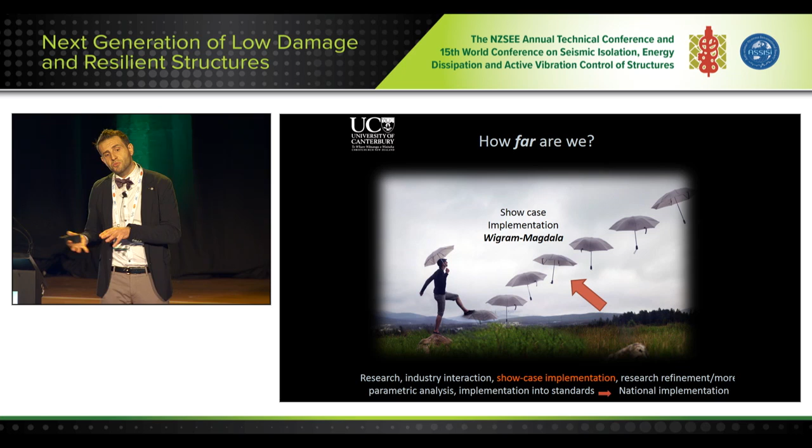The last one is an African proverb, very easy and short: if you want to go fast, go alone; if you want to go far, go together. Where are we? Halfway through, because we implemented the first bridge, but there's still a lot of work to do, because the main aim is to have some guidance implemented in the bridge manual for wider implementation nationally and worldwide. Thank you very much.

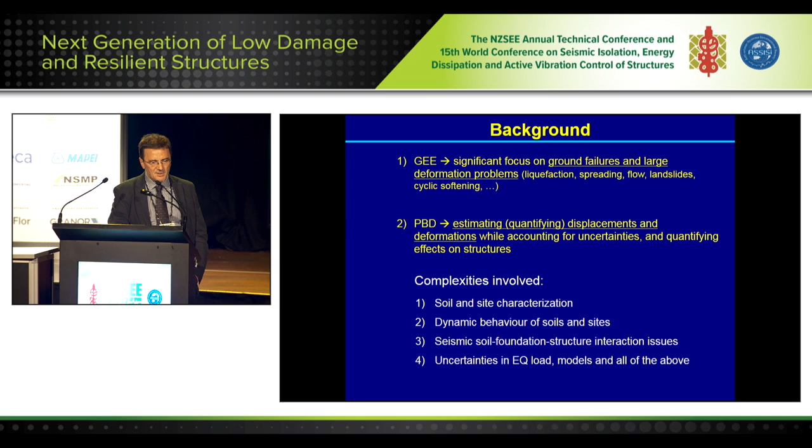When we are discussing damage control in structures, my view is something like this: in order to control the damage, we should be able to estimate the damage accurately. To estimate the damage accurately, you really need to understand the key mechanisms governing the deformation and producing the damage. For that, you need good models that will be able to quantify the deformations for the key mechanisms. And in all of this, you need to address the uncertainties in the assessment.

So in summary, for me, damage control calls for a quantification of the seismic response and effectiveness of control mechanisms, while accounting for the uncertainties in loads, properties, behavior, and the models that we use. So it's quite a complex task.

Let's now focus on some of the issues dealing directly with shallow or deep foundations. We can recognize several important domains of influence. Here is the first: the immediate interface zone between the foundation and the soil, in which the vibration of the superstructure and back-and-forth movement is going to induce some plastic deformation. We have to account for that interaction.

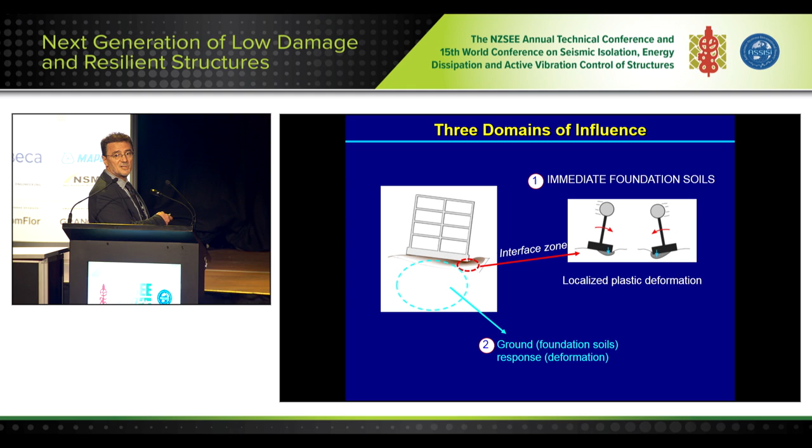The second domain is this foundation soil here, and obviously we are going to see what's happening there and how components or the structure can be affected by that. Finally, we have to understand that all of this is going to affect the system. We need to understand how the whole system — the building, the foundation, and the soil — is going to work together during the event. So I will say something about all these three interdependent mechanisms.

We'll start with the first one, focusing on one mode of deformation: one degree of freedom, considering rotation. At this interface, you can anticipate elastic rotation. There will be potential uplift of the footing, and there will be plastic rotation, significant plastic deformation in the immediate foundation soil. We can put this together into a single macro element and place it at the foundation level to model the effect of this interface interaction in our seismic analysis.

This is recent work done by Maximilian, who is sitting here in the audience. One of the things we would like to use this model for is to estimate the deformation of the structure while accounting for potential differential movements between different footings. So you need to model the whole frame and account for nonlinearities in the superstructure in this model.

I'm having the same famous problem. Can you move the slides for me?

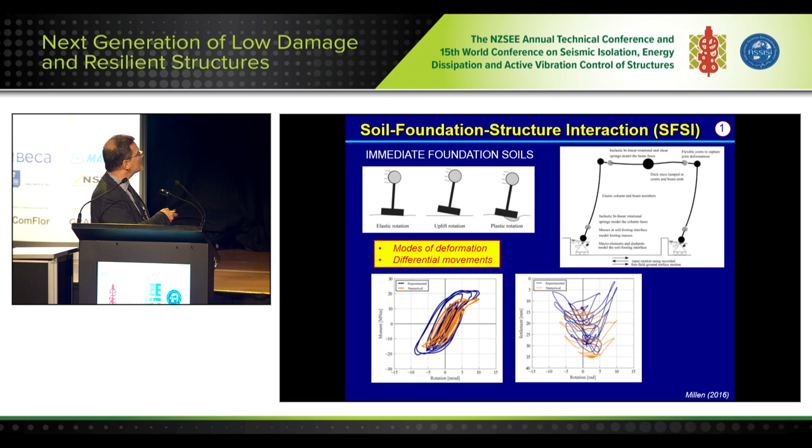In our analysis, there are different targets, but one target is to identify transient displacements as well as permanent deformations and displacements. From a geotechnical perspective, which is also very important for structural engineers, is estimating settlements, both global and differential. Differential movements are obviously very important. Next, please.

I will stay with this mechanism and present conceptually some ideas on how to use the rocking mechanism at foundation level to reduce damage in the superstructure. This is work by Gazetas, Anastasopoulos, and Pater, who have spent attention on this particular problem.

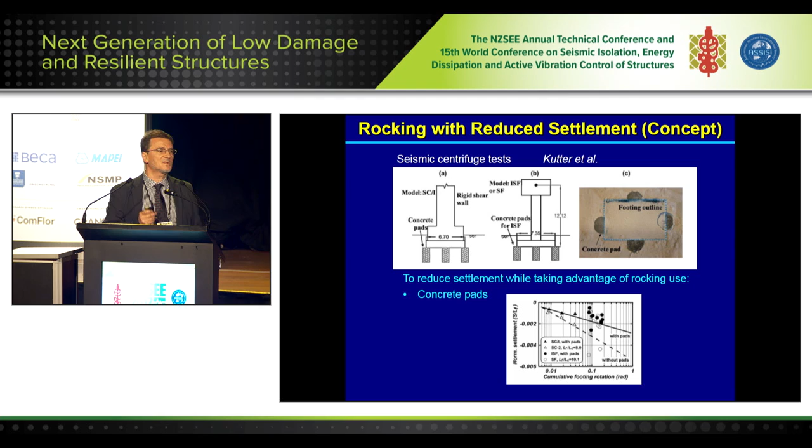An alternative approach has been used by Bruce Kutter, where they've used concrete pads beneath the footing to reduce the settlement. As you can see here, the settlement has been reduced from the initial levels to much lower levels through the use of the pads. In essence, out of two mechanisms, you're using only one. The rocking mechanism is dissipating energy through the rocking itself, which is repetitive, so the cumulative effect is quite significant, and through the yielding of the soil. If you make the soil not yield or dissipate energy, you're still using the first mechanism. So this is the idea behind that work.

So let's move now to the second domain, the foundation soil in the influence zone. I didn't know that I would have this kind of problem - I have a lot of animation in the slides.

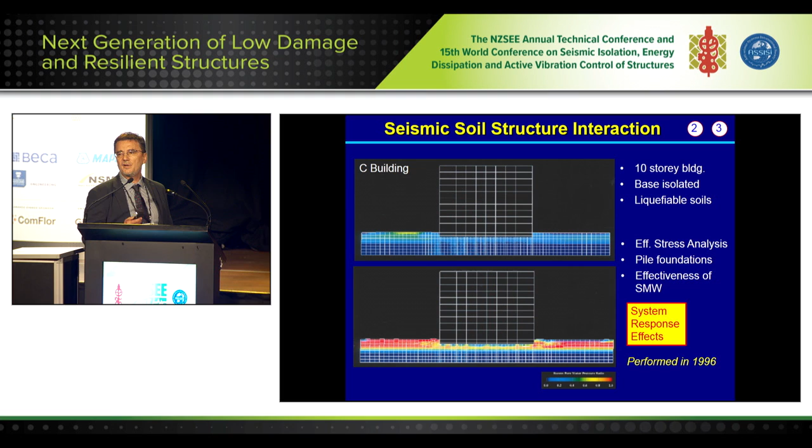So the key here is that we have to evaluate the system response. We have the superstructure, the base isolation, the foundation, the soil around, and ground improvement that is inside. You really need this kind of model to let you know what is happening with this system during actual excitation, and that feedback to the designer is of huge value. Now notice this - I did perform this analysis in 1996, and the implementation of this kind of analysis is really very slow. However, there is no replacement to this. This kind of analysis provides very important feedback to the designer about how the system is going to perform under realistic events. So we have to stick with this further in the future.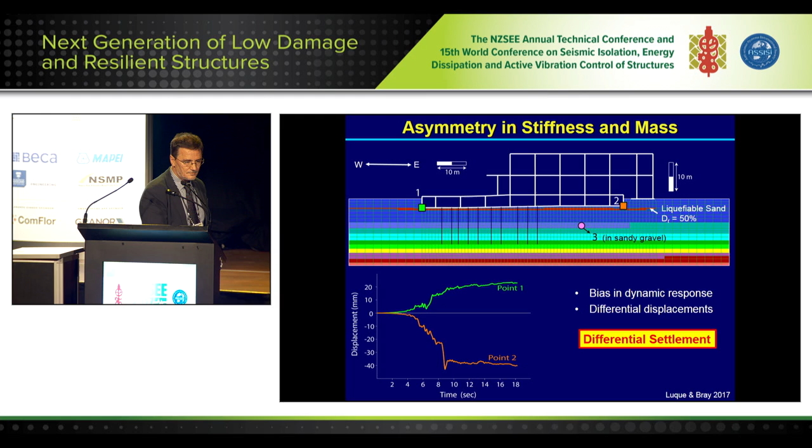So obviously, when designing to control damage in structures, we have to account for these details I was talking about. What is happening at the interface zone between the footing and the soil? What is happening in the overall foundation influence zone? How is the system going to perform and respond during this kind of event, including the mechanisms you're using for damage reduction? That is going to be a significant factor in the choice of foundations you would like to use in order to achieve the target performance.

Ground improvement is certainly a methodology used in geotechnical engineering to improve performance, so I have to say a few words about that. There are various methods, and they are really used to reduce ground deformations, and most of them would achieve that. That does not necessarily mean that you would reduce damage in your superstructure.

Here is one example from the 1995 Kobe earthquake, Oriental Hotel, a large structure on pile foundations sitting on top of reclaimed land. The quay walls go just around three sides of this building, and the piles are quite robust, 2.5 meters in diameter, about 30 meters long. Reclaimed ground, so obviously liquefaction was a concern. So they decided to use deep cement mixing and created a grid of walls, which were protecting the piles and allowing them to develop their lateral capacity so that the desired response was achieved.

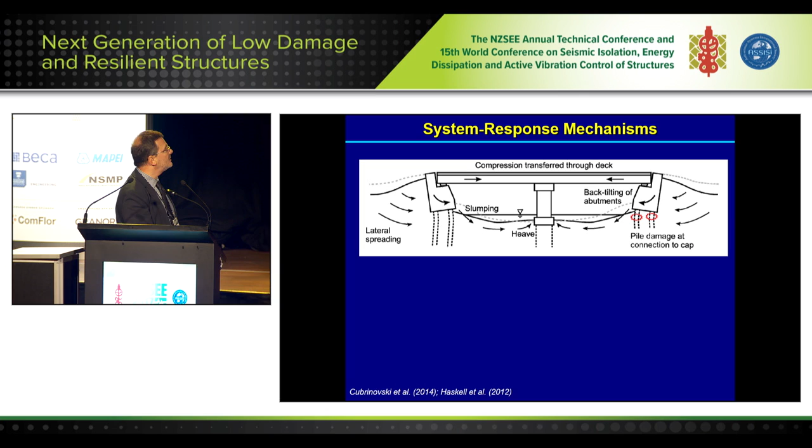And we were seeing that in Christchurch. This is now a case for the typical response of the bridges in Christchurch. We have lateral spreading pushing the abutments towards the bridge, which are then resisted by a very sturdy superstructure, developing a deck strutting mechanism. So abutments cannot move at that point, but they rotate around it, and we have this inward rotation of the abutments with consequent push of piles and damage. Again, this is really a response defined by the particular system components that control the bridge deformations, including lateral spreading, which is the key demand, and the sturdy superstructure, which is enforcing no movement at a certain point at the top of the structure.

So damage control calls for quantification of the seismic response of key elements and the system as a whole.

Thank you. So here are my concluding remarks, and I'm saving a little bit of time. For damage control in structures, we need to identify key mechanisms of deformation, and we need to quantify deformations and displacements.

In this process, we have to consider at least three domains of influence: the interface zone of the soil and the foundation, the overall foundation zone beneath the structure, which is the zone of influence I referred to, and the system response. We have to consider independent elements as well as interactions between all these components and the three domains, and in that process, we have to consider all the uncertainties in the assessment. I would say we've made very good progress in developing better tools and procedures to address these issues, but I think we should do better, both in developing better tools and processes to support the assessment. Thank you.

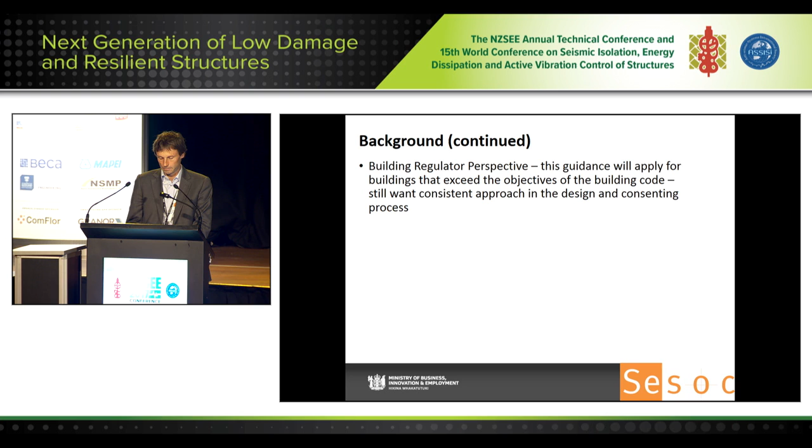The objectives of the low damage guidance document are to facilitate communication between the various parties involved in the design process, particularly at the outset of a project, when a building owner or developer may want to look at options that would best suit a project.

The document will set out a standardised framework of performance objectives and performance assessment criteria that are clearly described. The document is intended to be freely available, performance-based, and material system agnostic. It is also proposed to be the parent document to a potential suite of more specific low damage system documents, such as seismic isolation guidelines that Will Parker will soon talk about. The document is not intended to be a tome and is targeting a 50-page length. It is also anticipated to be endorsed as guidance to support the building code under Section 175 of the Building Act.

The process to date has involved a number of reference group meetings. The first was held in October 2015 and the last in June 2016. The reference group has included practitioners, academics and representatives of the NZSEE and SESOC, and they have assisted with shaping the content and direction of the document. A literature review was also carried out early on in the process to see what similar documents exist and how they could be utilised for the development of this New Zealand-centric document.

Between reference group meetings, a smaller core working group has been developing the content of the document, and this was continuing up until the 14th of November Kaikoura earthquake, when more urgent matters suddenly needed attending to.

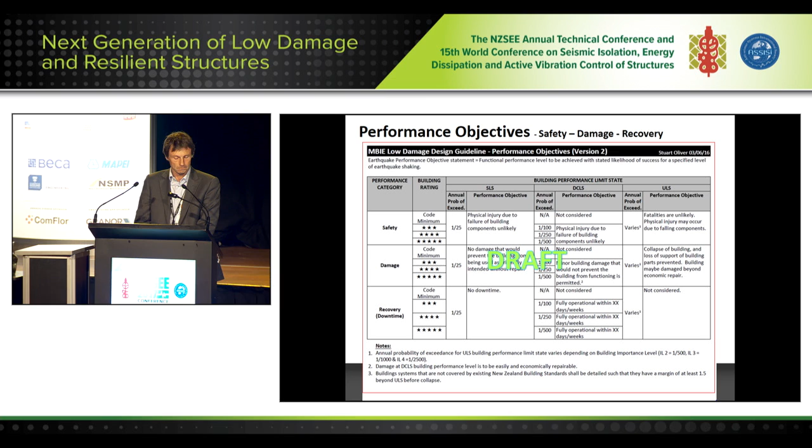Once the specific topics are agreed on, the next step is to map these to performance criteria. An example of some of the performance assessment or structural design criteria, as they may be termed, are presented in the next slide. This is where it is proposed to introduce the more specific technical aspects such as acceleration or displacement limits, as well as considerations on access to elements for repair. The degree of quantification in this document is intended to be limited, and the more specific technical criteria is expected to reside in the specific guidance for individual low damage systems.

So I hope you have an appreciation of where we are at with this project and what it is trying to achieve. Looking at the next steps in the process, we will hopefully soon get the working group going again to finalise a script document that can be presented to the reference group around the middle of this year. This should then point the way forward on what needs to be done to move from the developed script to a final product. When the document will be complete and ready for publication is certainly not clear right now, but I hope a year from now, at the time of the next NZSEE conference, we will be getting close to the end of the process.

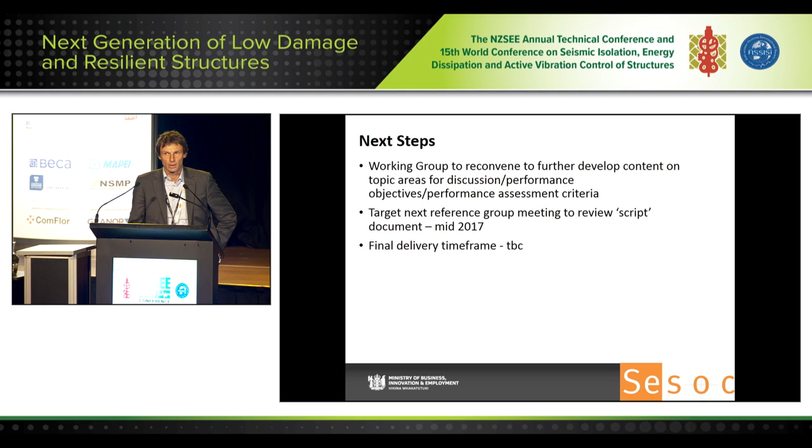Thank you. That's all.

Thanks very much, Dave. So the final presentation in this session is by Will Parker from Opus International Consultants, and he's going to talk about the development of guidelines for the design of seismic isolation systems in buildings that is underway. Thank you, Will. Hey, thanks, David.

You'll see that David and I are co-leaders of this guideline, so when we get to questions, I'm sure David will share that. And I'd really like to just say that I'm talking on behalf of the group. So most of them are here, not all.

Just a quick outline of what we're going to try and cover: just a bit of background and some objectives. Dave's painted a good picture there. Just some of the challenges we've had along the way. There's been a lot, and I think there's still a few out there. We're making really good progress, so I'll give an update on that. I'm going to try and show a bit of the guideline. It's quite hard to do because it's like, how do you share a New Zealand standard and make that sound kind of interesting and palatable, but I'll do my best. And then just what we've got to do to get the thing finished and what might happen after that.

So by way of introduction, Dave's kind of introduced it big picture-wise in terms of the Royal Commission, obviously uptake there of low damage. There was a lot of uptake of the technology in Christchurch after the quakes, so there's a lot more buildings down there, so a lot of people using the approach. It was initiated by NZSEE a few conferences ago, and it's been really well supported by all the technical societies and mainly funded by MBIE and EQC, but big thanks to all the other societies as well, and it's being managed by the Quake Centre, who are just kind of keeping us corralled.

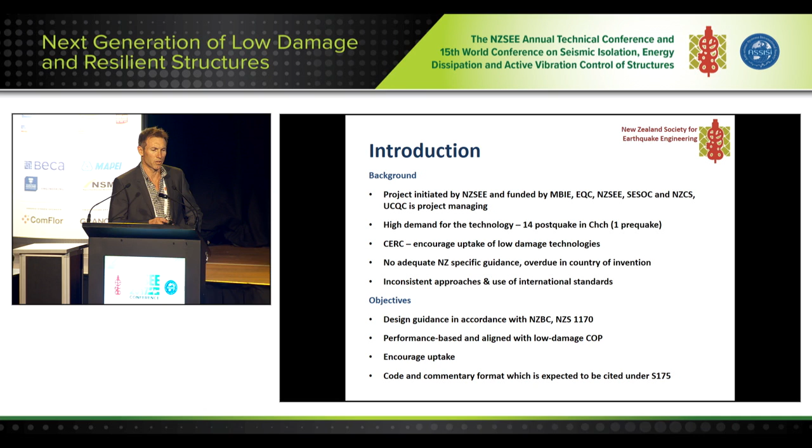Okay, so I'm just going to try and keep it a bit light. I thought, given that we're nearly there, we'll give ourselves a mark as we go through.

Just to pick up on the main challenges - a big one was, what do we do beyond ULS? Overseas codes talk about MCE, and that was not really an easy topic for some of us in New Zealand. So we've managed to get there, and we've called it a limit state called collapse avoidance limit state.

Consistency of approach with the isolation system itself and the superstructure - that was in some ways quite a biggie, with some different things being done, and I think that's been really successful.

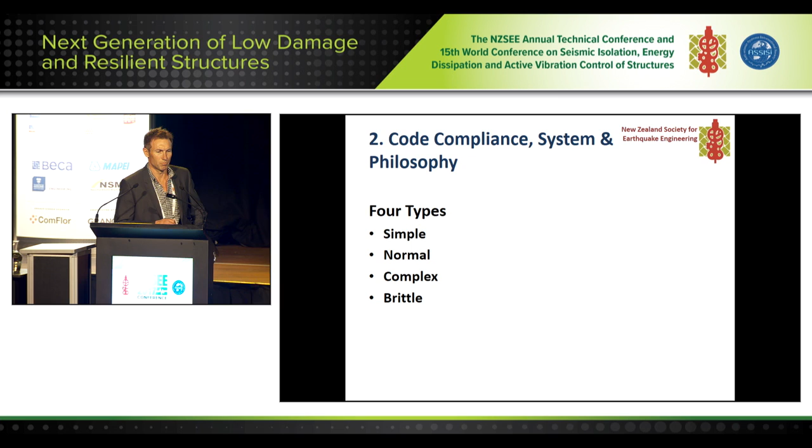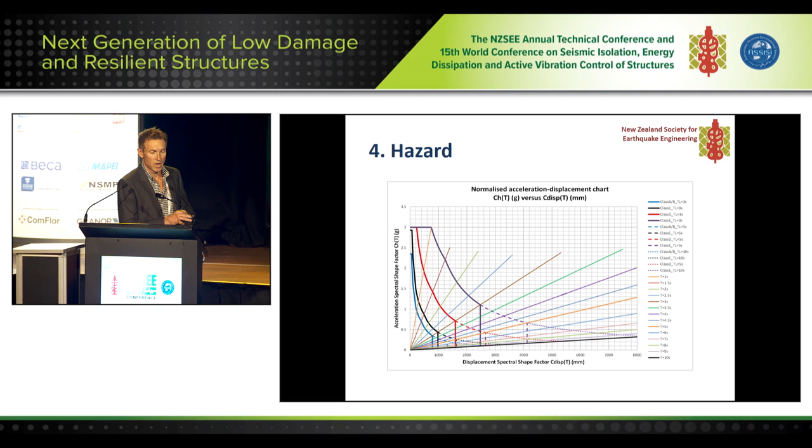Sorry, I realized I had one of my slides out of order, but this kind of goes with the resilience factor. Coming out of the hazard, this is looking out to the longer periods. If you look at the solid line, that is the 3 second. If you look at the dash line, that's 5 second, which is quite relevant for some of the more flexible isolators you can get. You can see, just looking at those displacements, what a difference that makes. The dotted line, the fine dotted line going right out, is 10 seconds. We don't really expect to get there, but that's just to show where GNS have taken the thing out to.

Just an update on progress, we're actually getting pretty close. We've got a draft document together and we've sent it to four plus international reviewers, three or four of them are in the room, so it's really great to have them. We're trying to organize a discussion on the fly while those people are together, and that's all being collated. We've got a spreadsheet which captures everybody's comments, and what we're going to do about them, so we can send the spreadsheet back to them so they can understand what changes we've made to incorporate their feedback. Then we just need to finalize the document and publish it, make it available as a working draft, and we really encourage everybody to look at it, hopefully use it, and provide feedback so we can continue to improve it. Then there'll be some training as well, and make sure that document gets disseminated.

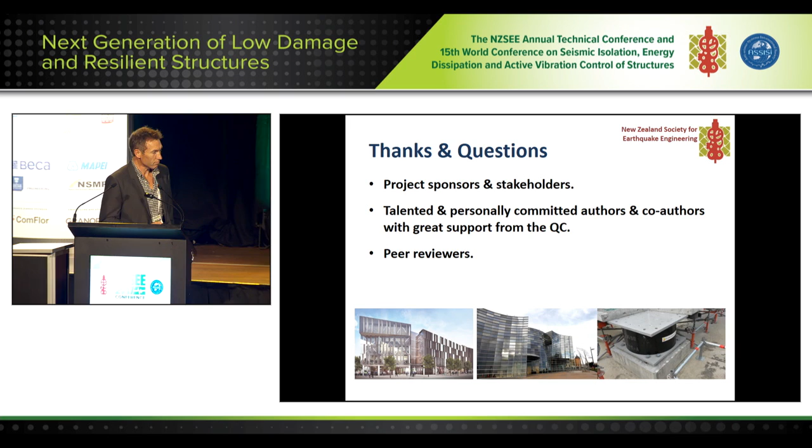So do you want me to start off with a question, David? I know I think there's a few there, but I was going to just pose one, and there's another obvious one.

We pretty much settled on this, and then we thought, well, maybe we're actually being too conservative. We've got a collapse avoidance limit state, and you could argue we're already putting a margin on that with our resilience factor, or if we don't have one. So we're trying to scale back our factor up to effectively what is collapse avoidance. The question I want to pose is, in the US, as you're probably aware or have heard today, they pretty much have a blanket MCE of a 2,500 year return period earthquake, whereas we're very much governed by our importance levels. So what we're suggesting is that we scale that back - for an importance level 2, we have a higher factor, and lower for importance level 4. So I'd invite people to jump up and comment on that. Should we have a blanket MCE, or should it be importance level dependent?

Do you want to take over from here, David? Go back to the question answering. All right.

Thank you. Okay, and Peter. Graham first. I think that perhaps we can design a building to be earthquake-proof for a given specification of ground motions, but I think we've still got a huge amount to learn about just how strong ground motions might be. When I started my career, we thought El Centro was strong. Now it would be regarded as relatively weak. We've had near-fault motions come along. We're only just starting to learn about the duration and strength, particularly at long period, that we might get out of great subduction zone earthquakes. So I think we're still a little way off even knowing what we should be designing for, let alone doing the design.

And the last comment from Peter Wood. I've got two quick points. The first one: the goal of an earthquake-proof building can be there, but to suggest it can be delivered in the foreseeable future has to be resisted significantly. I have one detailed comment that relates to the reference to importance levels. Why do we have different importance levels? I would understand that as an economic factor in the design. I'm also very conscious that when you change the use of a building, the importance level might be inappropriate, but it's still the same building.

Be careful. Thank you. I think the consensus is that we should not use this term earthquake-proof yet, but it's still a desirable thing that we're aspiring to.